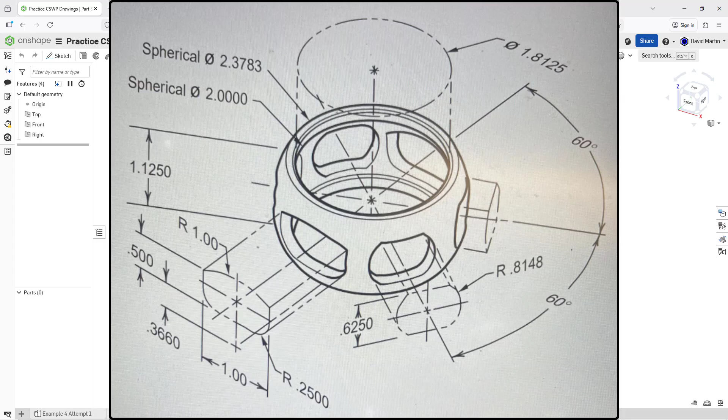Here I am in my part studio. Let me make sure that I am in inches. I will go to the hamburger and then workspace units. Let's change from millimeters to inch and then hit the check mark.

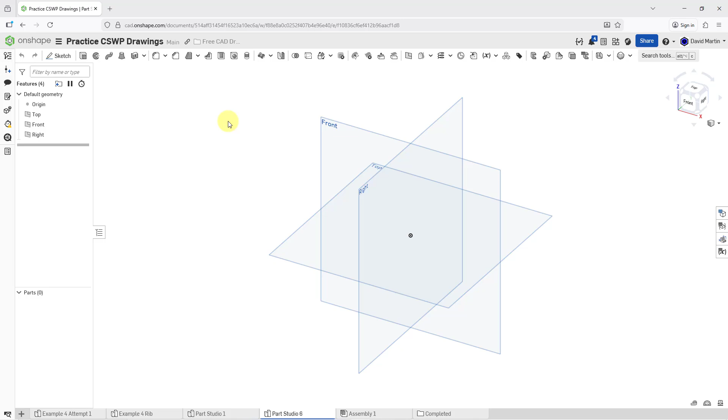For my revolve, I'm going to define the sketch on the plane called front. So let's select it and then right mouse click and hold, new sketch. Right mouse click and hold, view normal to the sketch.

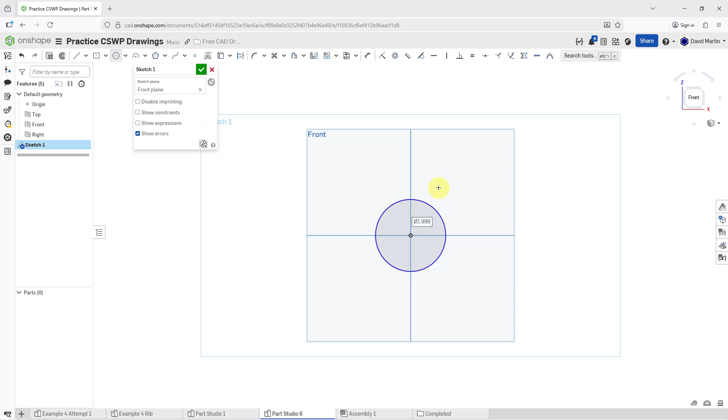I will start with the spheres. For the spheres, I'll start by sketching a 2-inch diameter circle. Let's go to the circle tool and then focus right on the origin and drag it out and make it about a value of 2 and hit the enter key. That's good. Let me zoom in a little.

Then let's make another circle and then drag it out. And here's where I'm going to make a slightly different dimension. I'm not going to put 2.3783. That's ridiculous. Let's do 2.375. All right, that's good.

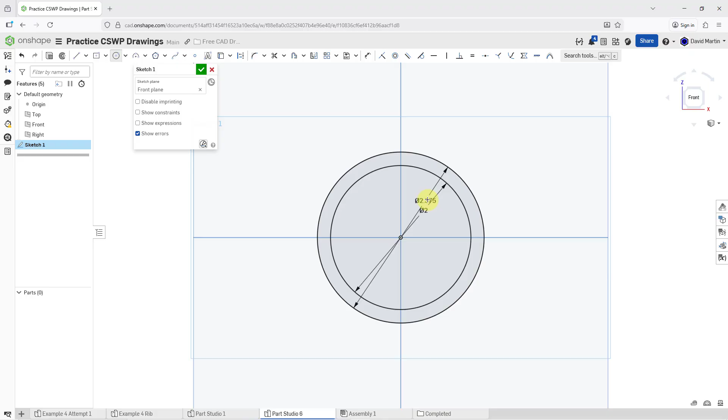Let me grab the dimensions up. Let me hit the escape key to get out of creation or whatever mode that I was in for creating circles.

Okay, so let's see. We also know the height of this. It's going to be 1.125. So for creating that, I'm going to sketch in a center point rectangle. Let's center right on the origin and make it about yay big. And let's see, for the height, let's type in 1.125. And then I'm just going to hit the tab key so as not to define another dimension.

Or let's hit the escape key. And so in order for this not to be blue, let's throw in a tangency constraint. Let's pick the side and then the circle, and it adjusts.

We also have an indication of the inside vertical diameter. It's that 1.8125. Hey, let's do that one as well.

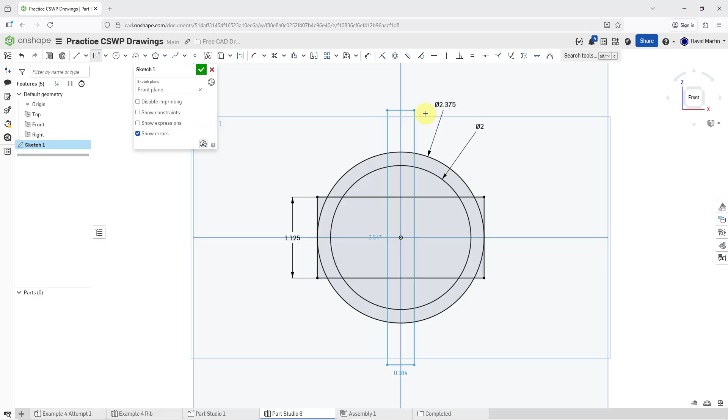Let's create a center point rectangle and snap it right into here. And again, I'll just make it out about so big. Let's see, 1.8125. Drag it about the approximate width. And then enter in that value, 1.8125. A bit ridiculous, but we'll leave it.

And then for the height, I'm just going to hit the escape key again. And to get rid of the blue, let's once again throw in tangency and select the line and then the circle. And there we go. Now we are all in black here. Let me hit the escape key to get out of creating that.

And just to make things a little bit easier for the revolve, I'm going to turn something into a construction line. Let's just get rid of this as construction. I'm just going to use that little sliver in there in order to make the revolve.

Oh yeah, since I'm going to be revolving this, I will need a vertical center line. So let's let it snap into the origin and then drag it vertically and then hit the escape key. And so that is everything that we need for this sketch.

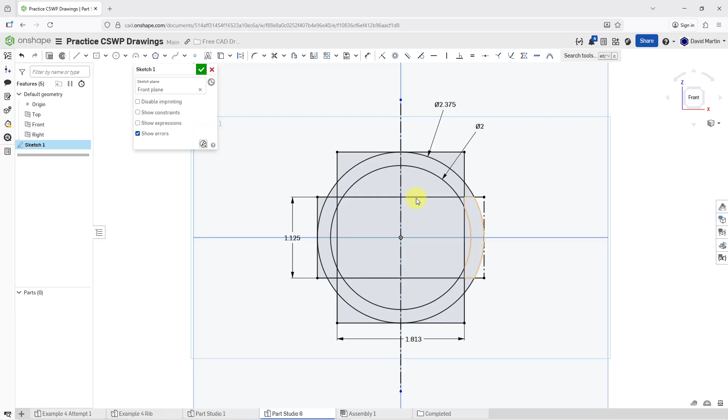Again, it's like all that sketching just for this little bit over here. All right, let's hit the check mark. Let me zoom out. Let me hit the keyboard shortcut P to turn off the display of planes.

So we will create a revolve, and for the face that I want to revolve, it's just going to be this little sliver. What word am I trying to say? This little portion inside here. And what makes it really easy in Onshape is the fact that we don't have to do a whole bunch of trimming. We can leave all those different entities in our sketch.

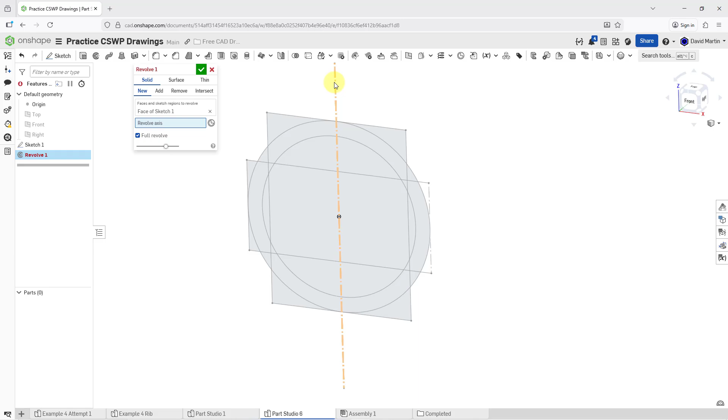All right, revolve axis. That's why I put in the vertical construction line. And so this is the main body. Let's hit the check mark.

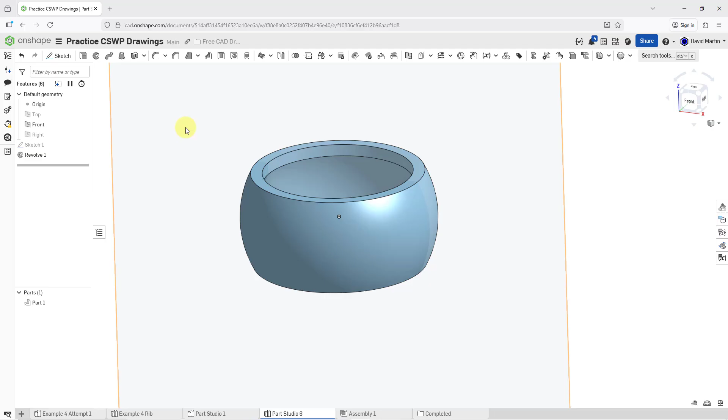And then for the first cut, note that the cuts going around aren't all the same size. There's actually one cut and then two other ones. So let's select the sketch plane front to sketch on.

Right mouse click and hold, new sketch. Right mouse click and hold, view normal to the sketch plane. And then I will zoom in.

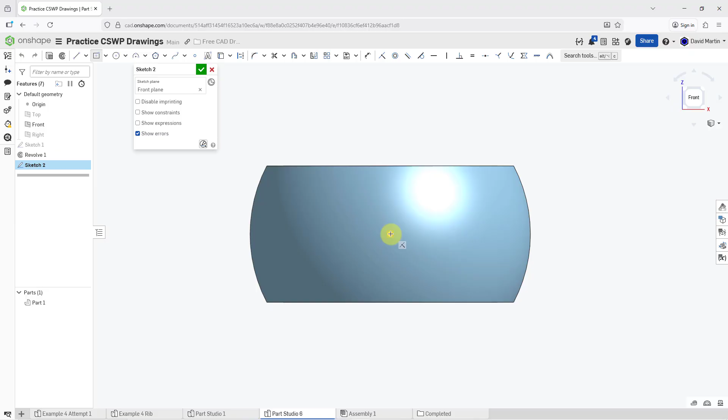And so this one is basically 1 inch by ½ inch rectangle. So let's put in our center point rectangle. Oh yeah, there's a dimension from the bottom point, 3660. I'm going to make an assumption that this is supposed to be centered on the middle because that is a dumb dimension. But anyhow, let's drag out the rectangle and let's see, let's make this dimension 0.5 and this other dimension 1. So that is good.

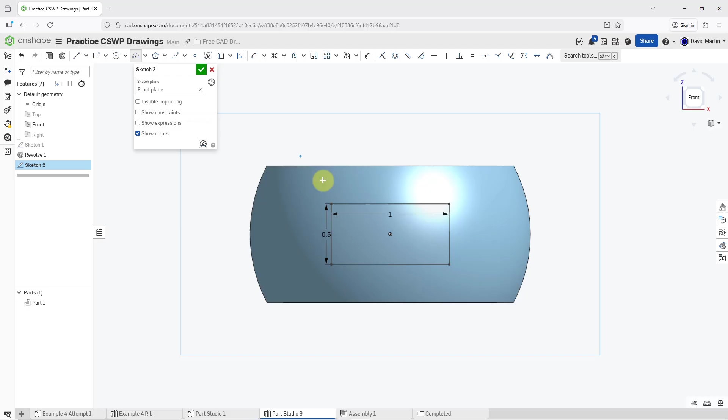Let's see, we're going to need an arc at the top with a radius of 1. So let's go to the 3-point arc, select one corner and the other corner, drag it out, and type in 1 for the value. Let me hit the escape key to get out of there.

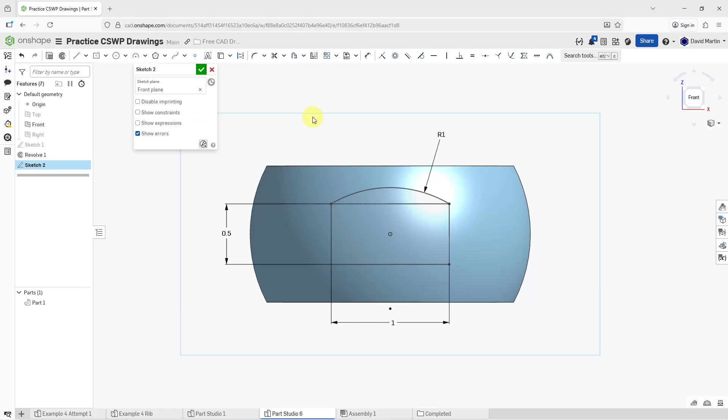I just want to drag the radius dimension out, and let's drag some of our other dimensions off of the geometry. Also there's a fillet radius of 0.25 at the bottom corners. Let's go to sketch fillet, select one corner, select the other corner, and then left click when we're done. It's suggesting a dimension of 0.25, which is great. I will hit the enter key.

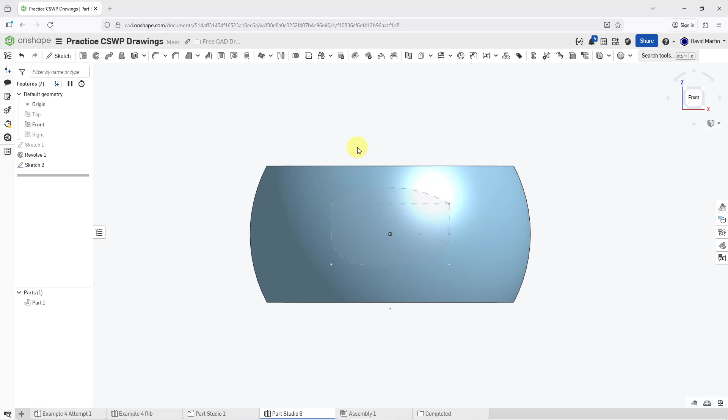So this is our sketch for one of our cuts. Let's hit the check mark. Let's rotate the model. Let's hide the plane.

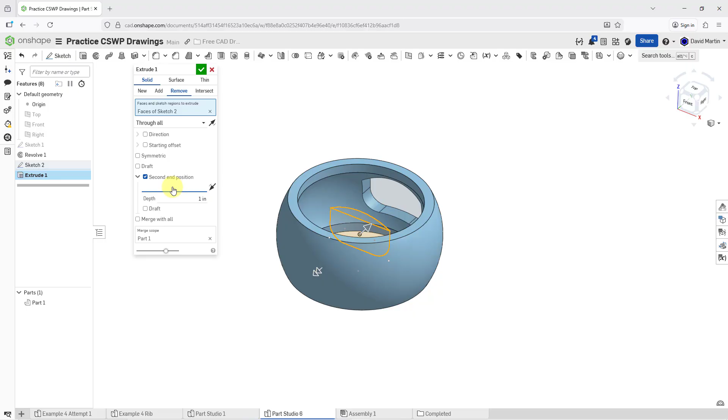Let's hide the plane called front. To make this one easy for extruding, I'm just going to select the sketch first, then do the extrude command. Let's change this to remove material, and for the depth this will be through all. Add a second end position, through all as well. And we are good. Let's hit the check mark.

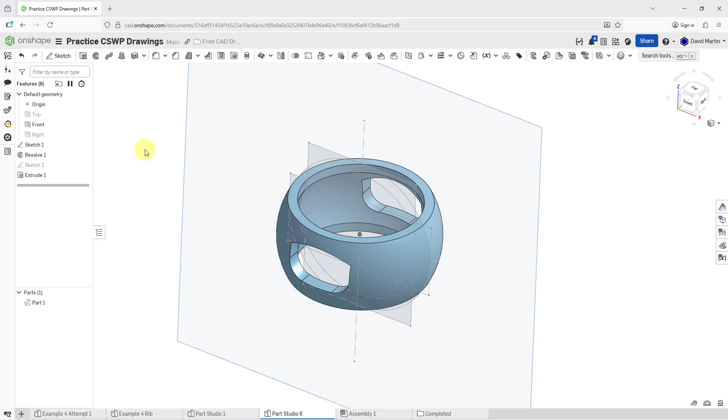All right, we've got another cut that's rotated 60 degrees from this one. So I need the plane called front, and I need the sketch once more in order to create a plane at a 60-degree angle.

Let's click on the tool for creating new planes. There are a bunch of different options, but it suggested the one that I want to use, line angle. So the entities, this is our edge, and then we can also select the plane front that we're going to dimension from, and then 60 degrees. So it creates it in there, and I don't care about flipping it. This is good. Let's hit the check mark.

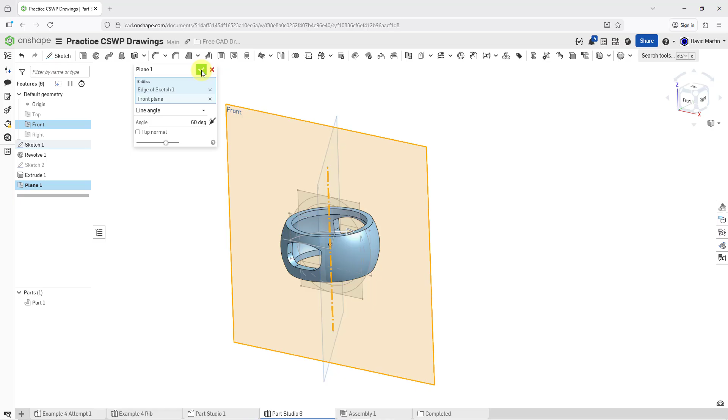Let's hide the plane called front. Let's hide the sketch. And let's see, which way are we going to look at the plane? Let's select our plane, right mouse click, new sketch. Right mouse click, view normal to the sketch plane. And as long as I'm here, let's hide that plane that we just created.

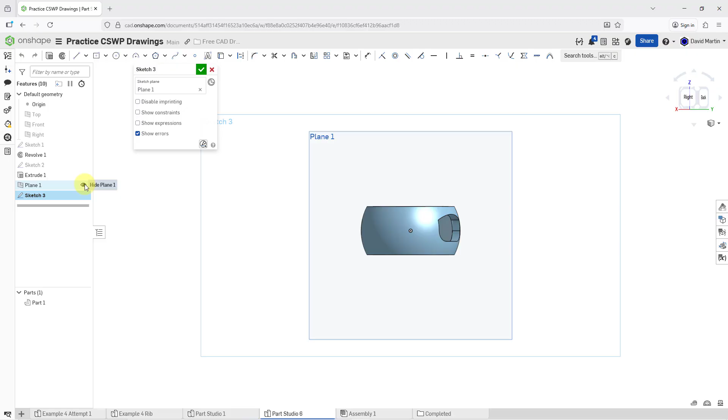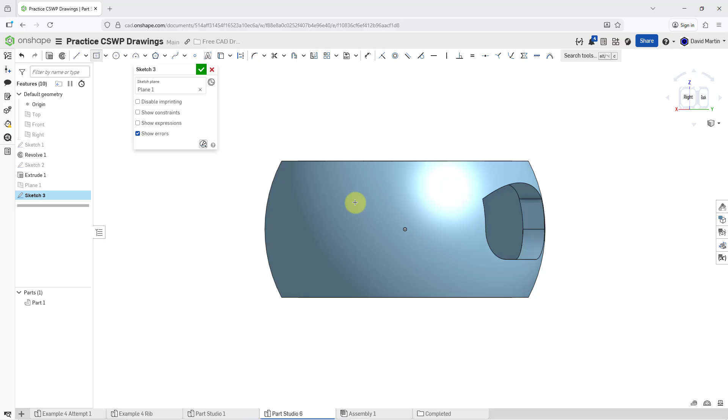Okay, for this one, I think there's information missing in this drawing. I'm not exactly sure how wide this other cut is supposed to be, so I'm going to make an assumption. I'm going to say it's going to be 0.625 on the top and bottom, and then throw in a couple of arcs. There's a problem with the arc, but let's throw this in here, 0.625, 0.625. That's good. Let me hit the escape key.

I'm going to grab my dimensions and drag them out. Let's throw in our arc, 3-point arc, one side and then the other side, and drag it out some. Right now this is a radius of 0.496. The drawing says radius 0.8148, which is a ridiculous number, but that is probably just wrong.

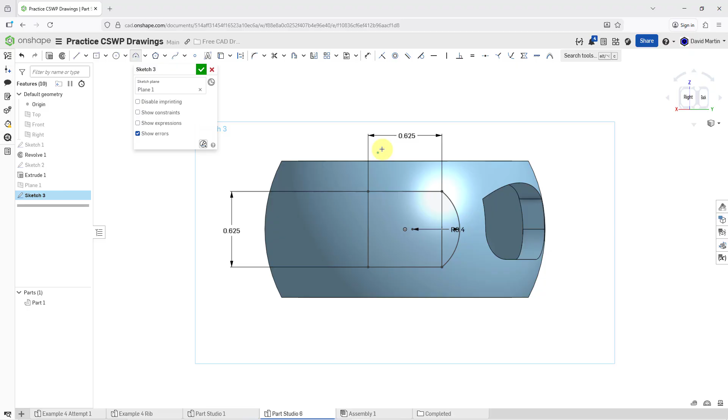Let's enter in a value of 0.4 for the radius. Not even going to do half of that ridiculous number. And let's see, I want to mirror this over onto the other side.

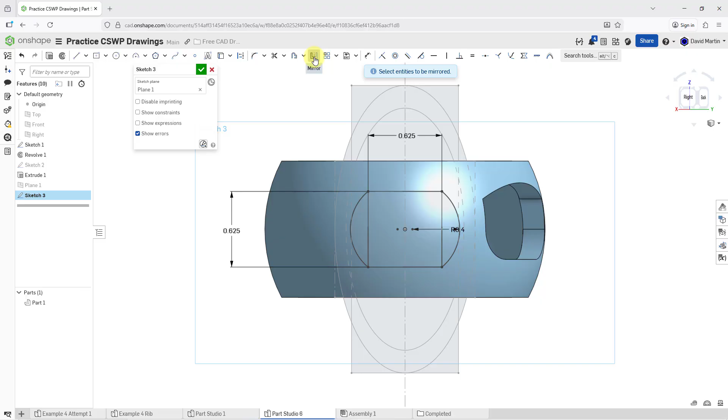You know what, let's bring sketch 1 back for a second. Let's go to the mirror command, select a mirror line, and I'll use that vertical center line. Then the entity to be mirrored, let's select that. And then get out of the mirror command, hide that sketch 1 again. This will be good for the cut. So let's hit the check mark.

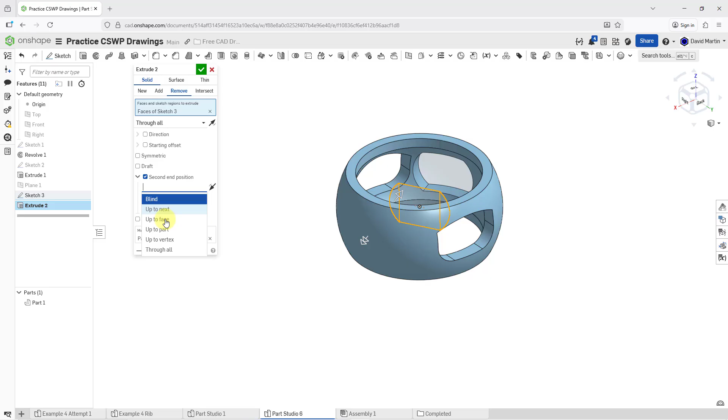Let's save time by selecting the sketch to begin with, and then extrude. Let's remove material, through all, second end position, through all. That's good for that. Let's hit the check mark. And so there it is.

And so, yeah, this is just really ugly part in there. Oh, look at that geometry. It's okay from the outside, but from the inside there, I don't like that. I would not design like that.

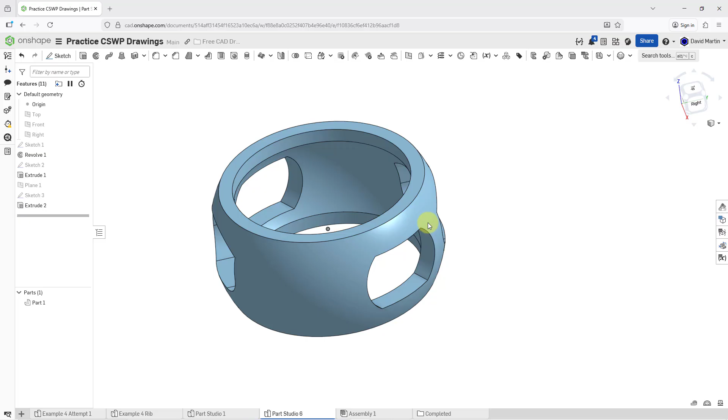But anyhow, we need to create another one of those 60 degrees away. So let's go to the circular pattern tool. Let's see, where's our, yep. If you go to the drop down from linear pattern, here's circular pattern, entities to pattern. Oh, let's change it from a part pattern to a feature pattern first. For the feature, I'm going to select the extrude right out of the features list.

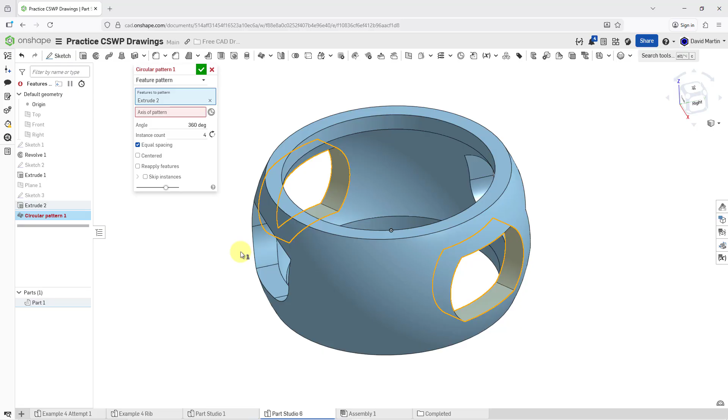Let me move everything over. For the axis of the pattern, hey, I always like mate connectors. Let me select a mate connector. Get a mate connector right in the middle there. And let's create them equal spacing. Nope, let's not do equal spacing. Let's do angle 60.

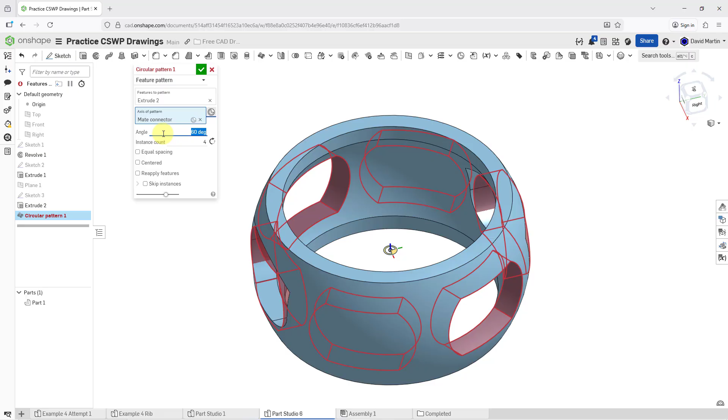And we just want a total instance count of 4. Let's try flipping the direction. There we go. And so that looks good. Let's hit the check mark. And there we have it.

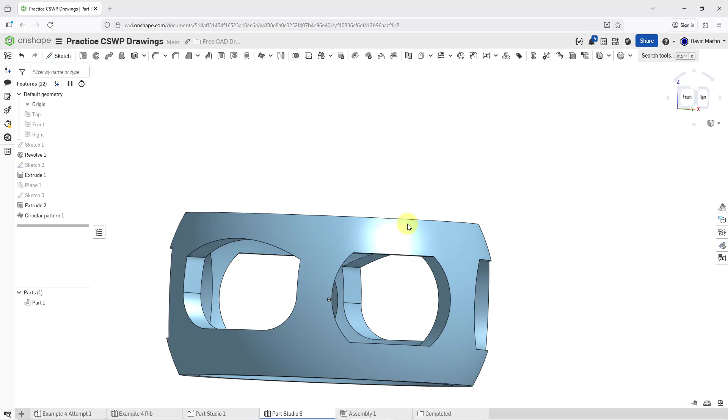This really, really bad, ugly drawing is now completed in Onshape. And so again, just not as hard as it looks. We just did a revolve, a couple of cuts, and a pattern of the cut to get it another 60 degrees rotated. But there you have it. Give it a shot. It's kind of fun. Try it out.